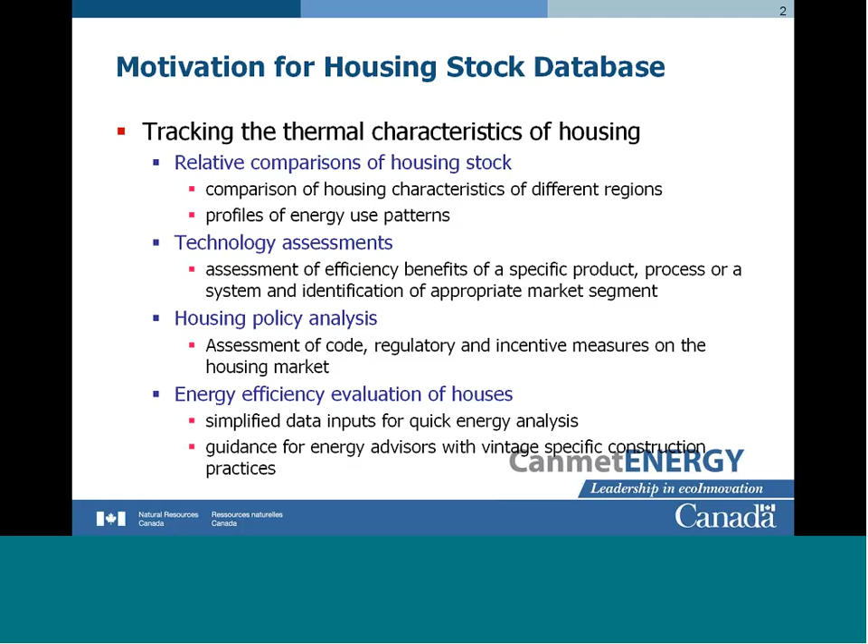But before that, I just want to give you a quick overview of Canada's housing stock. In Canada, we have right now about 14 million dwelling units, and about 85% of our housing stock is at least 25 years old. Every year, there are about 180,000 dwellings built - that's new construction.

About 85% of housing stock is located in British Columbia, Alberta, Ontario, and Quebec. So that's our major population areas.

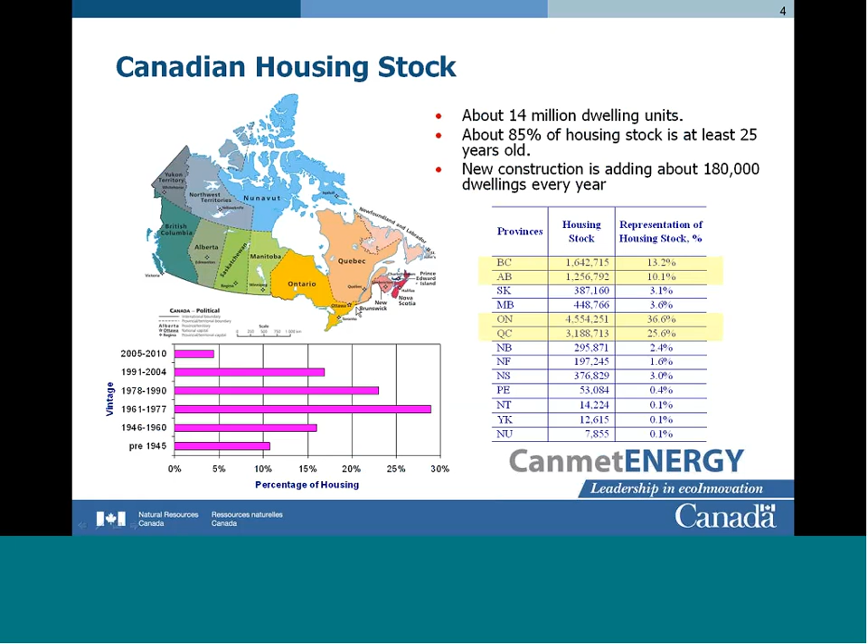The housing stock, about 58% is single detached, single family homes. There are about 10% which is attached, in the sense that they are row houses or semi-detached homes.

On the primary energy source, this is mainly for space heating: 46% of the housing stock is heated by natural gas and 38% with electricity. In remote areas, wood still plays a major role.

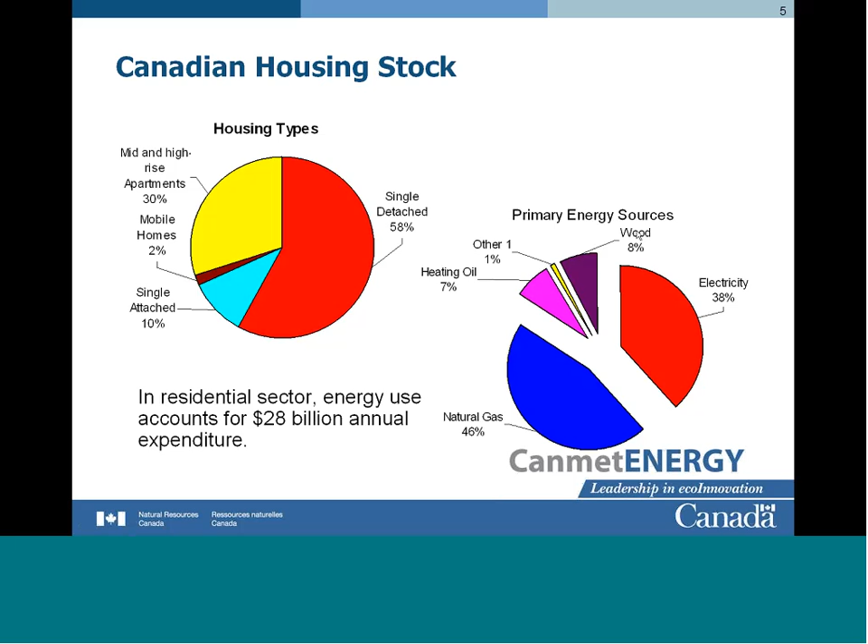Now the airtightness requirements, as such in our National Building Code, which is basically a document adopted by all the provinces - most take the clauses from that. Since 1990, we require continuous air barrier requirements, and there are about 20 different requirements there.

But there is no set value of airtightness which is considered in the National Building Code. It's mainly prescriptive requirements, that one should do this type of joints, the sealant used and all, but there is no set value or requirement in the National Building Code or provincial building codes requiring a certain level of airtightness.

We are, for the upcoming 2012 National Building Code, proposing a set value of airtightness. We are not sure whether that will go through or not, but we have made that request.

In the energy code, we have an assumption of 2.5 air changes per hour at 50 Pascal, and that comes from our scanning of airtightness of new housing over the last 5 years across Canada.

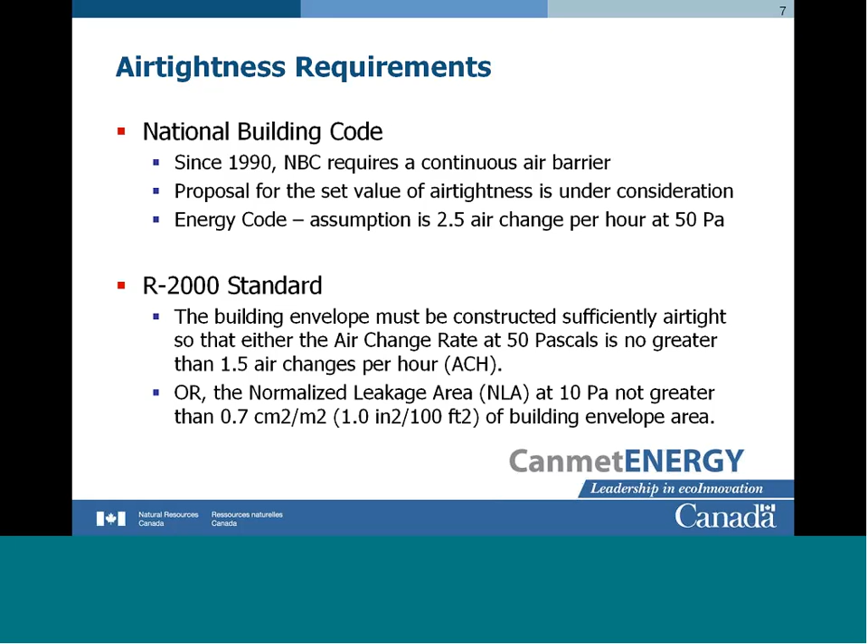We utilize in Canada the CGSB 149.10 standard. This standard originally came out in 1986 and is still being used, and it provides information on how to do the test, at the same time selecting the equipment, calibration, and calculation methods for defining the airtightness of houses.

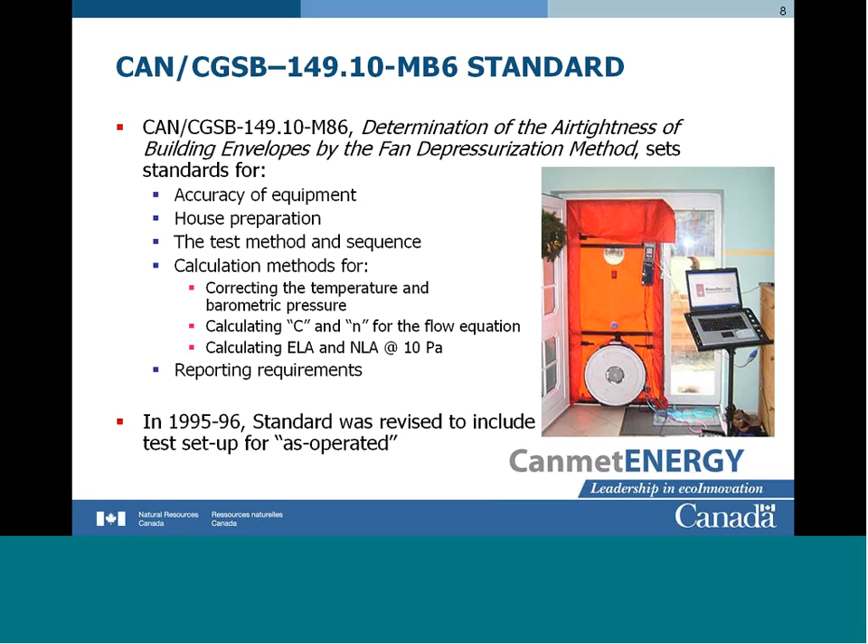Just to give you a quick overview of this test procedure: the house is prepared, there are certain requirements for sealing some of the holes and such, and the standard provides hole details and those things.

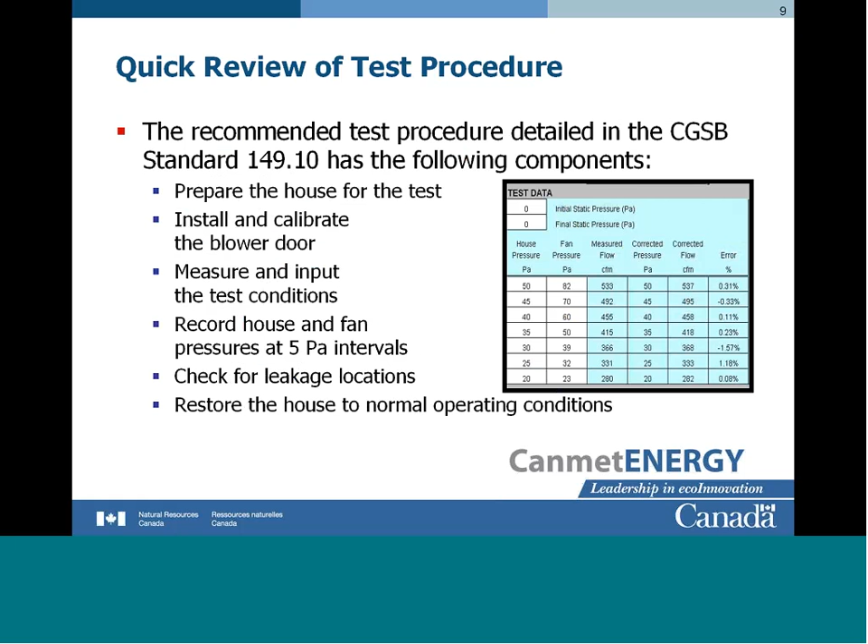We do this blower door test, which is common in most other international standards also. Take this data and then fit this regression curve, in the sense that we can come up with the C and N value and derive the air change at 50 Pascal, equivalent leakage area at 10 Pascal, or the normalized leakage area at 10 Pascal, or different parameters on that.

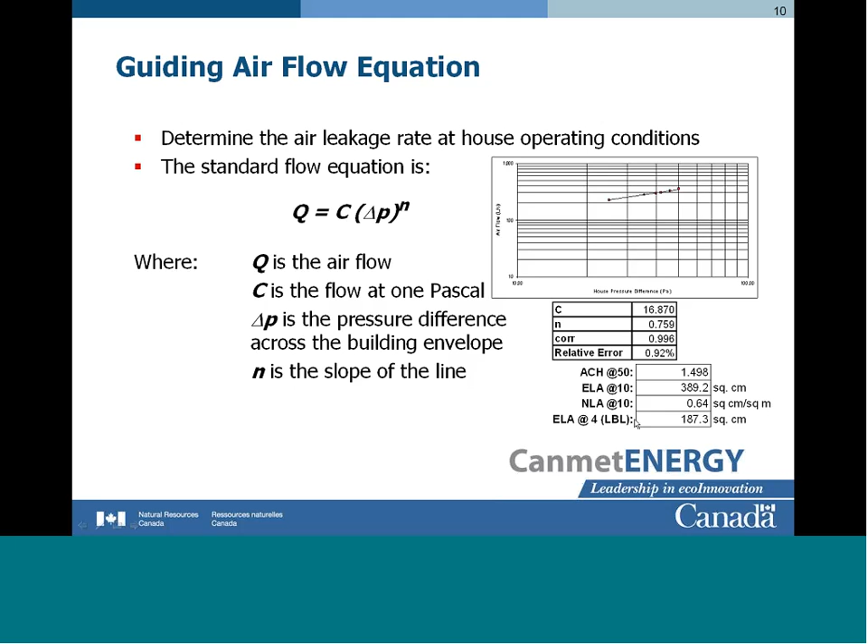The airtightness indicators which we use are mainly the air change per hour at 50 Pascal pressure difference, or the equivalent leakage area ELA at 10 Pascal pressure difference. But there is also NLA, the normalized leakage area, obtained by taking the ELA and normalizing it per the surface area of the building envelope, or the NLR, the normalized leakage rate.

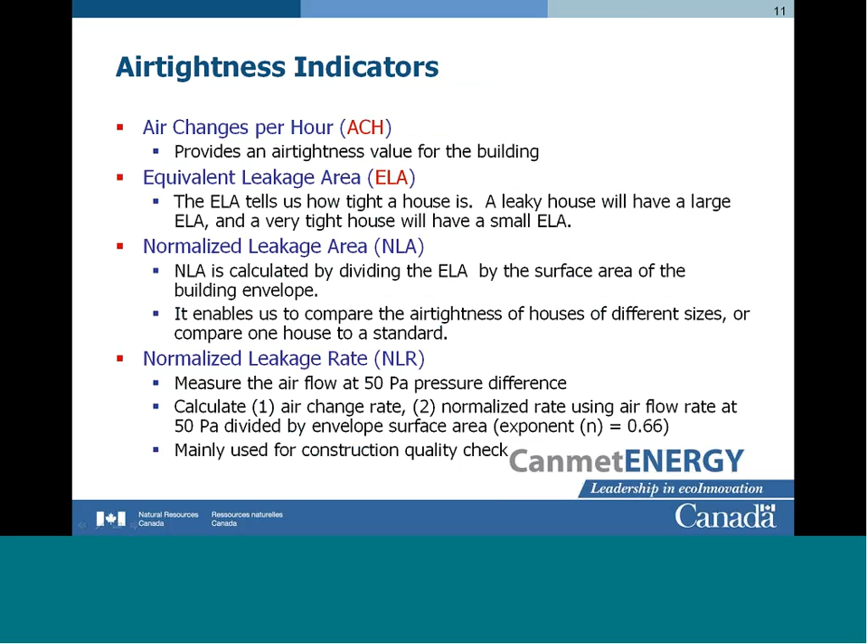This NLA and NLR is generally used for construction quality checks. So I'll just provide you some more information about our database and the analysis of it.

Since 1998, we have had a few home energy retrofit programs, and as part of that, a typical assessment includes the walkthrough evaluation, gathering data for the whole home, and also doing the air leakage test. Right now in Canada, we have more than about 2,100 qualified energy advisors offering these services under the ecoENERGY Retrofit – Homes program.

This program also provides some financial incentives to homeowners to do retrofits in their homes, which are also matched by other utilities and the provincial jurisdictions.

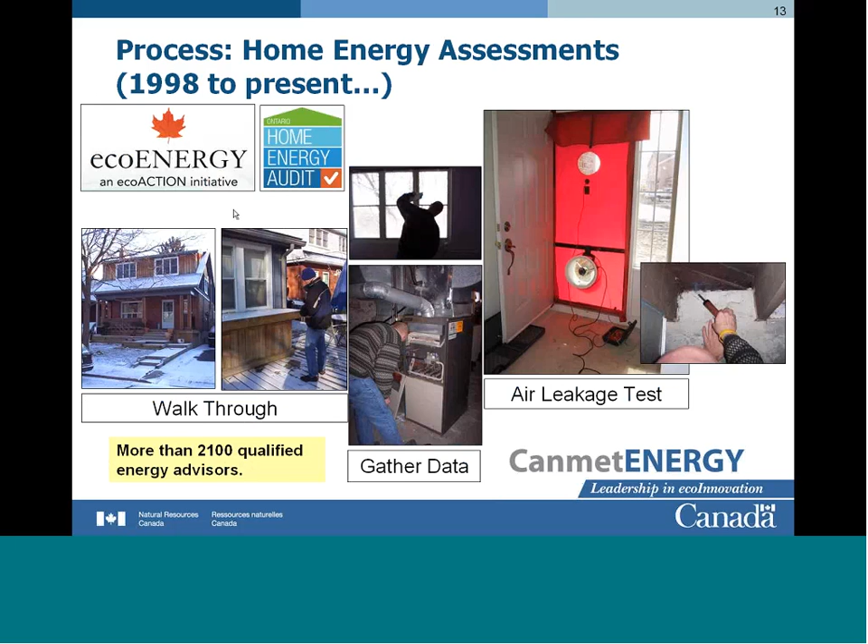So we have gathered pre-retrofit data on more than about 846,000 homes over the last 12 years or so. Mainly these are low-rise, up to 3-story homes. Out of those, more than about 634,000 houses have actually implemented some of the retrofit measures.

In the database, particularly for analysis of airtightness and energy efficiency measures, we included about 634,000 homes. The idea for picking these is that these houses have been evaluated twice, pre-retrofit and post-retrofit, so we want to make sure the airtightness tests done before and after have some validity.

Taking this data, we established 4 different criteria to do the evaluations: house types, age groups, climate zones, and type of primary fuel systems.

We had about 190 homes from this set of data where we had done very detailed monitoring, including some of the utility data and all those things, just to verify the energy consumption in those homes.

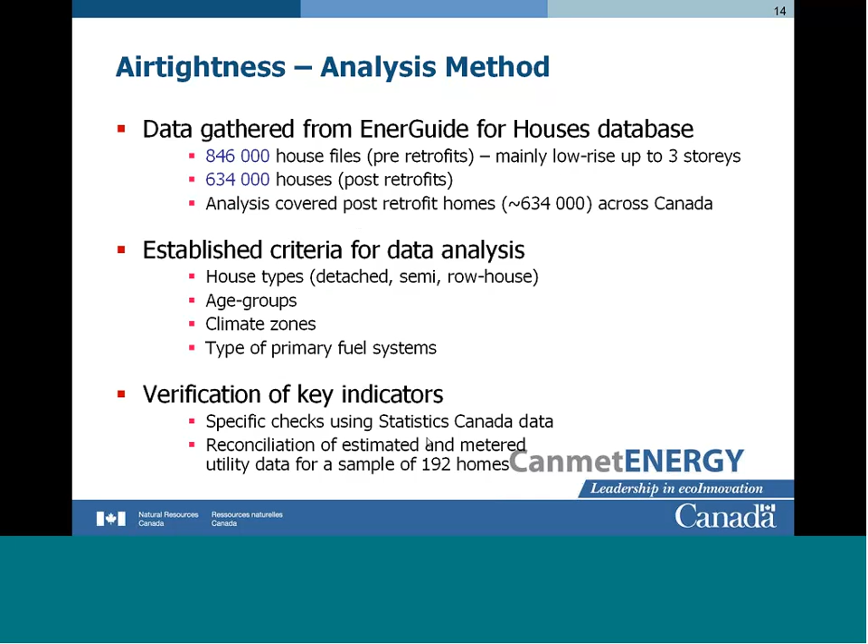Just to give you an idea, our sample size is about 635,000 homes, which represents about 5.1% of the whole housing stock.

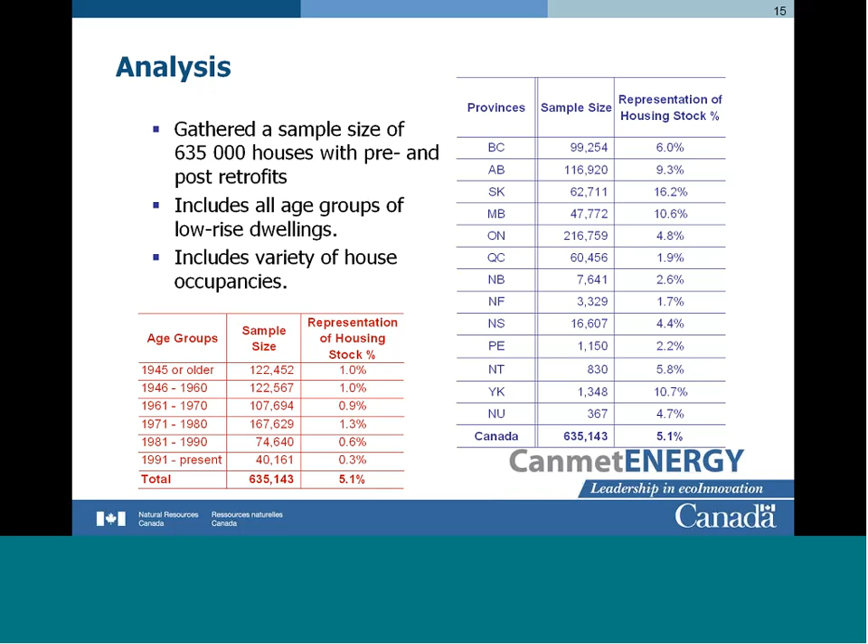So it's quite a large database, and although we still haven't done the statistical analysis, looking at the large size of the database, it shouldn't be far off.

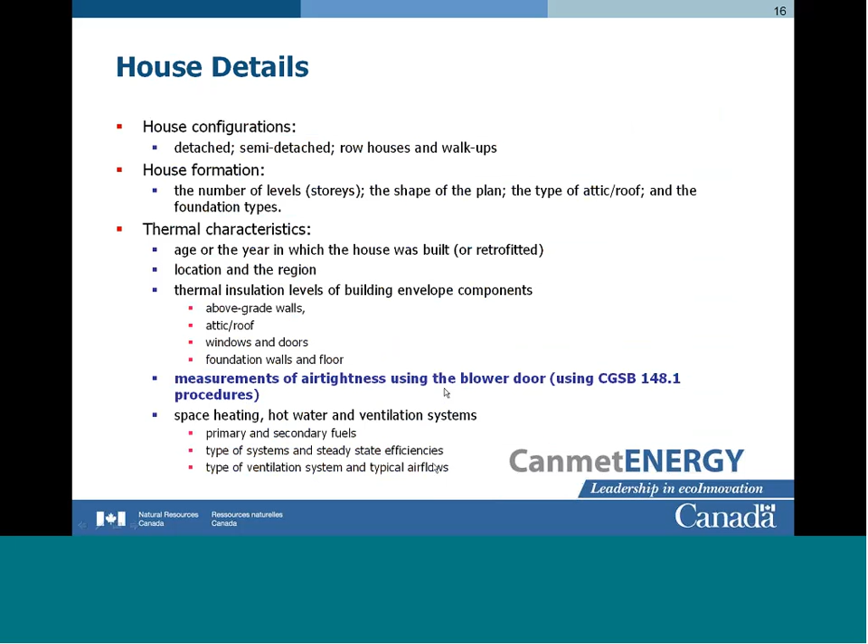As part of our data collection, we collect more than about 220 different variables for the home, which includes the house configuration and formation, the thermal characteristics, the thermal insulation values, the areas of different components, including measurement of airtightness using the blower door, and all the space heating, hot water, ventilation and air conditioning systems information.

So based on that 635,000 homes, just to give you the data on that, airtightness of homes has improved over the years.

In fact, right now most of our new housing comes in around an air change rate of 2.5 to 3 at 50 Pascal pressure differential. The houses are becoming more airtight, and that is requiring some mechanical ventilation in homes.

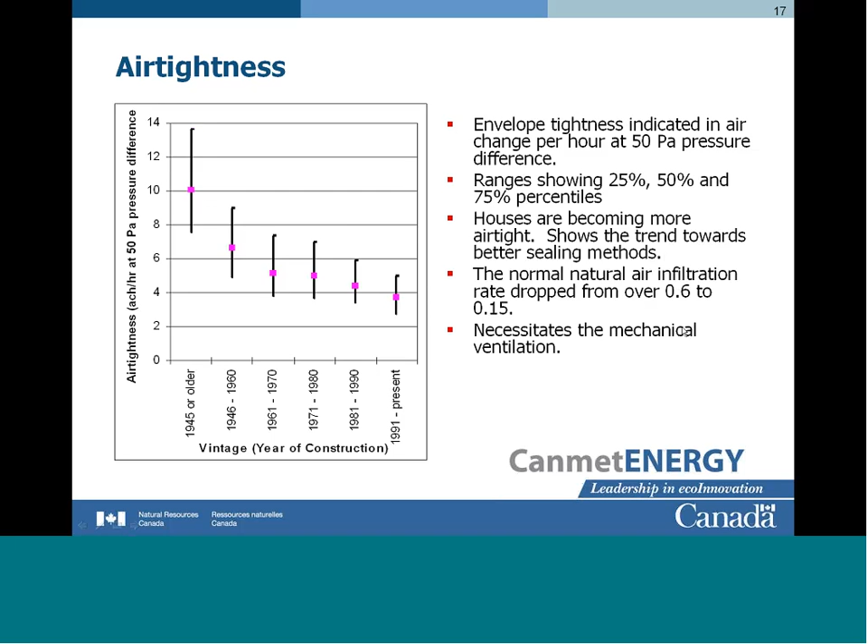The next group is between 3 to 6, which are the houses built in the last 20 years, and some of the older homes where the airtightness we have found is more than 7 or 8.

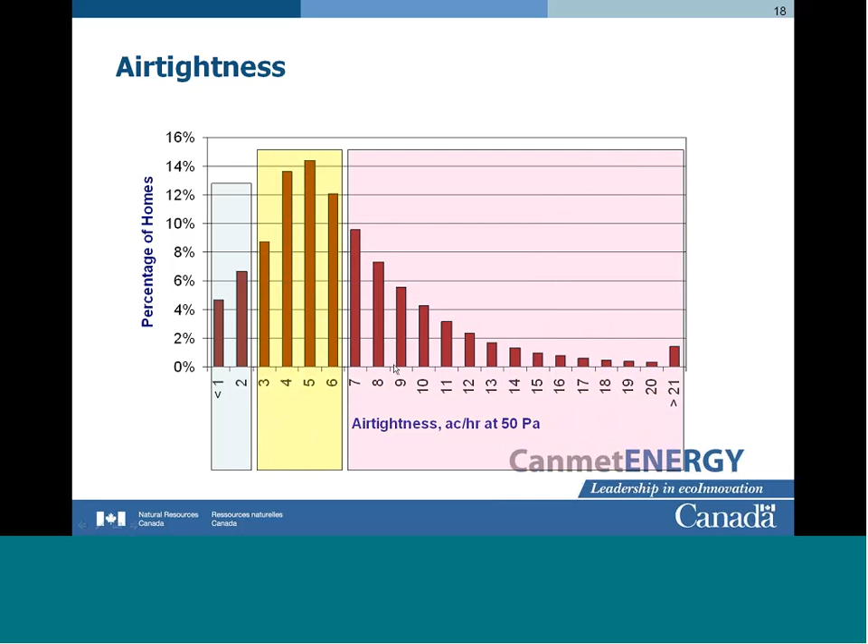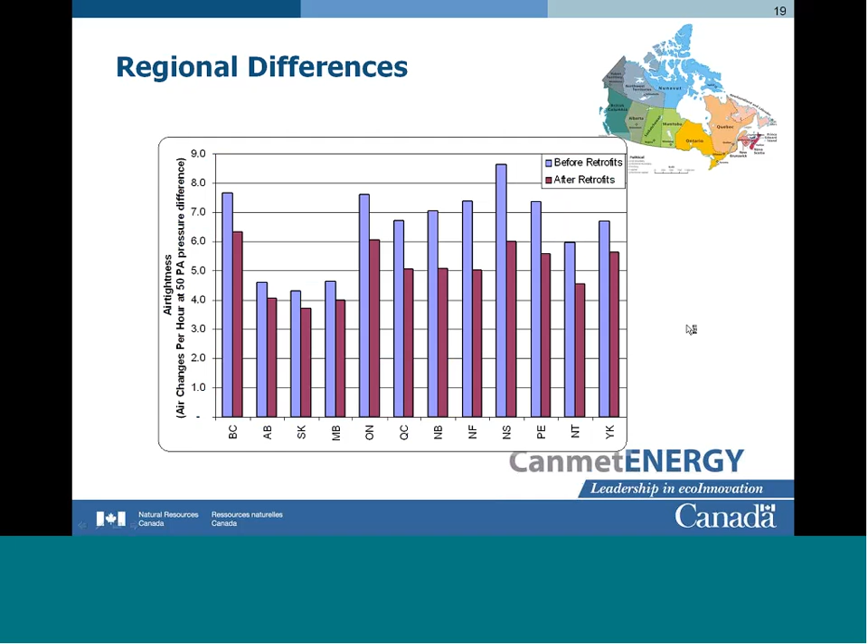So they are becoming more energy efficient, and this follows through in different regions also. The level is different, but it is there.

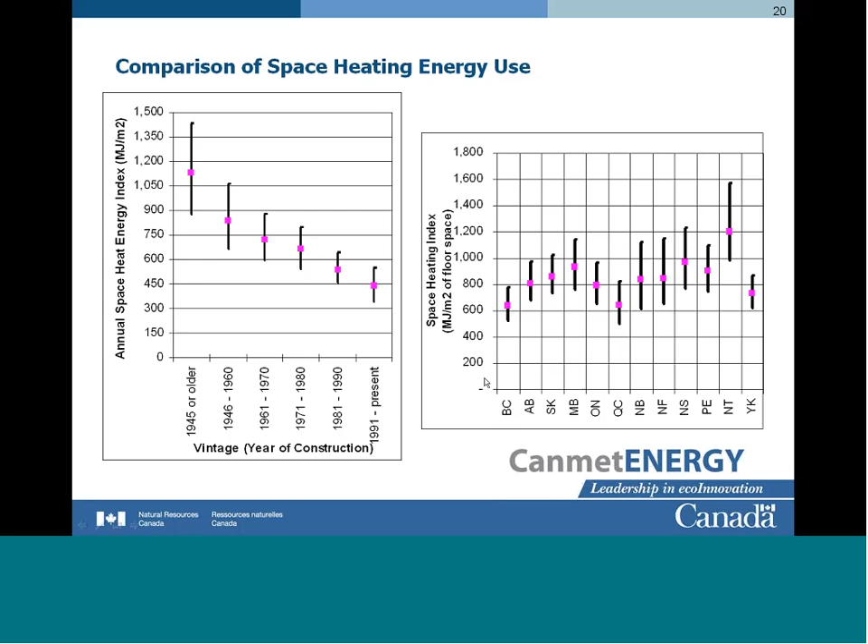So our next generation programs will be looking at much better, much more aggressive energy efficiency measures in the codes and all.

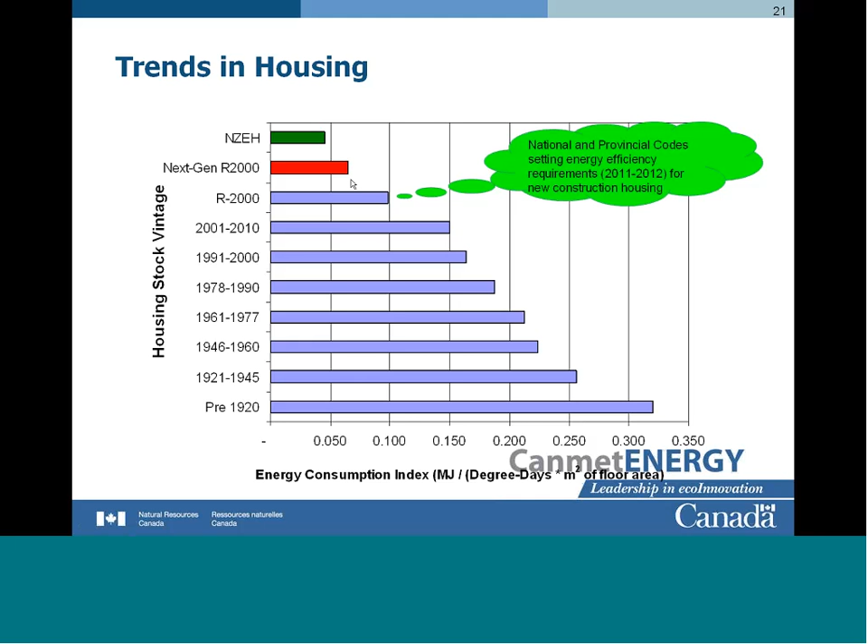So that's my presentation. We find that the thermal characterization of Canadian housing stock actually helps us in developing policies and also provides some future opportunities.

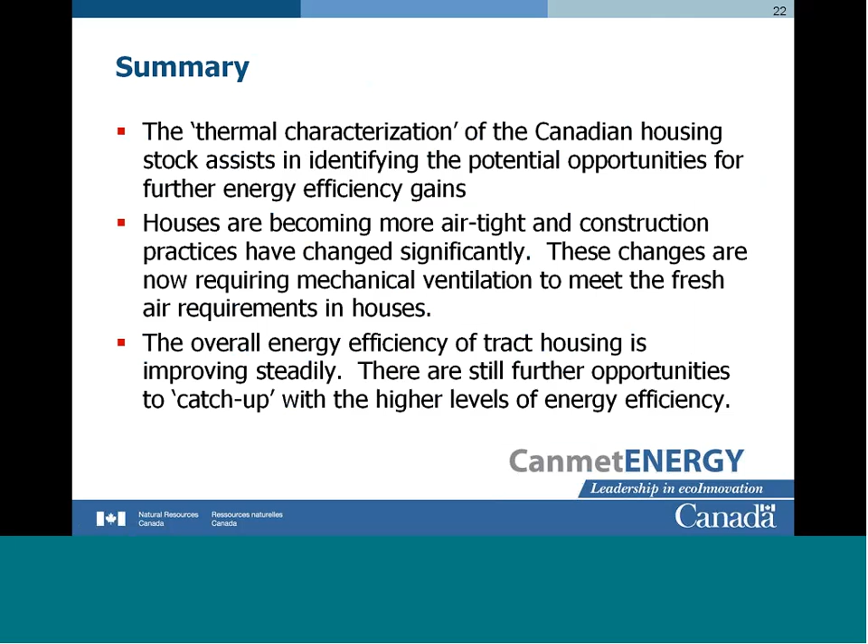And since the houses are becoming more airtight, since 1990 we have had mandatory mechanical ventilation requirements in most of our codes. Energy efficiency of our tract housing is improving steadily, but we still find there are quite a lot of opportunities there. So that's the summary of my presentation.